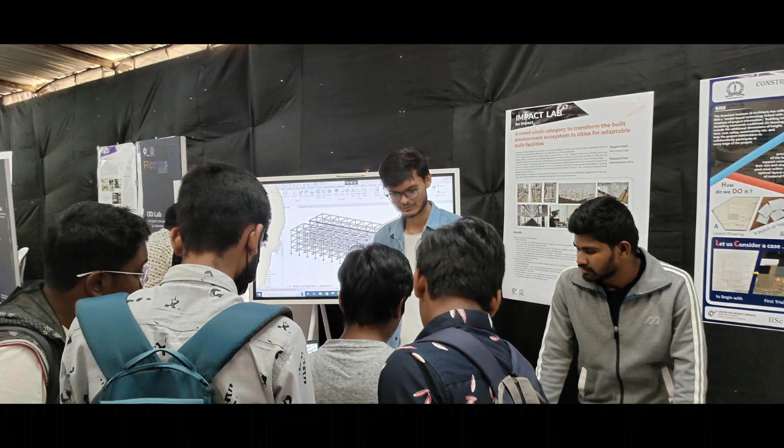Actually, this is a monopoly kind of game which we are developing to test adaptable real estate, to change the real estate environment in the built area. Right now we have permanent houses and some prefabricated houses generally, but once we bring that prefabricated home to one place and it's installed, we cannot do anything.

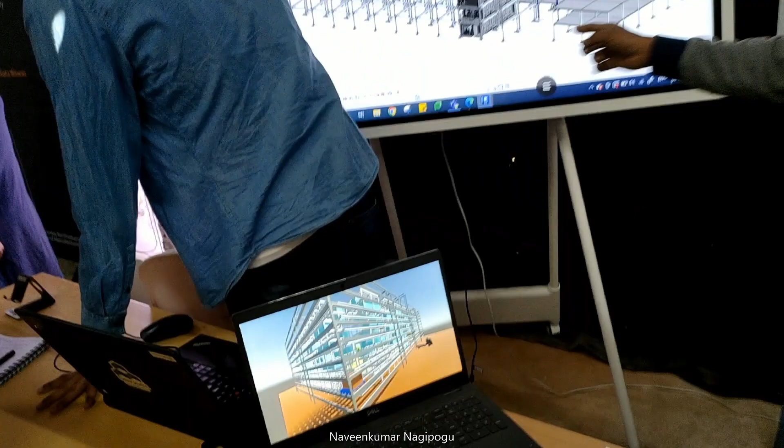Yes, we cannot pass. But in this case, we are developing the modules. This home is not a single unity, it is made up of individual modules. I will show that.

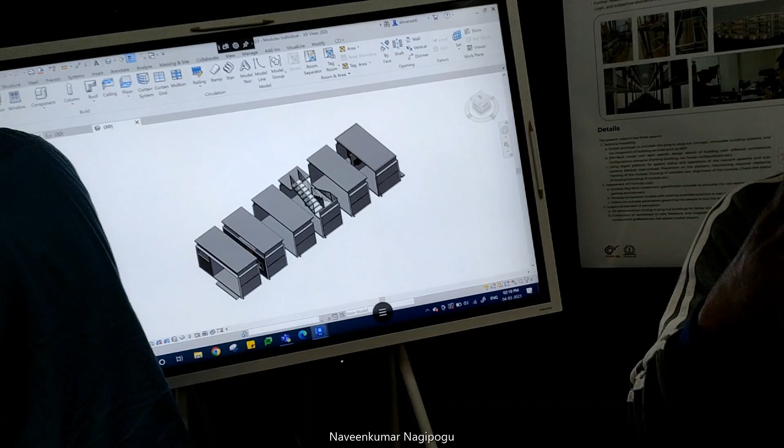That home is made up of the individual units like this. Whenever we are combining, we can go for whatever, what I can say, an apartment or a community or a one old home. Right now we develop.

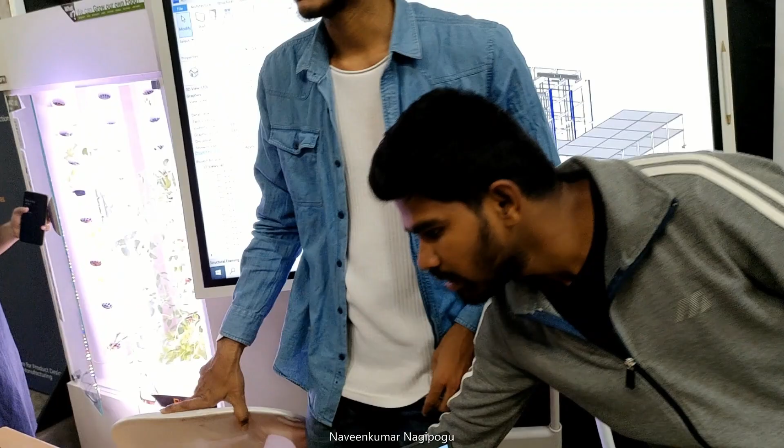So the temporary nature of it, right now we are just testing to the G+3 apartment kind of thing, and here we have 6 modules in each floor.

Like we are calling it a row house. It's a row house kind of concept. We have G+3, and it is now in future.

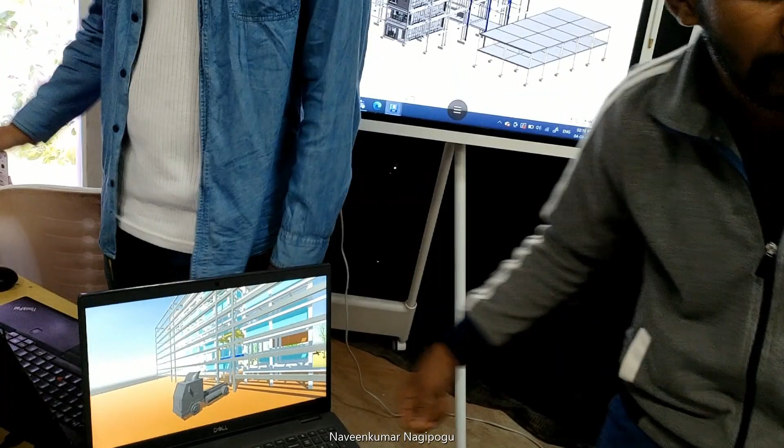We are carrying the modules and we have a platform, we have a crane, and it will be distributed among this whole apartment. It's just like plug and play. They are plugging in and plugging out. Like that, the modules, whenever, wherever you want, you can plug out and plug in.

You are carrying your suitcase now. If you are going somewhere, you can take your home or module also. Modular or portable house construction. Yes.